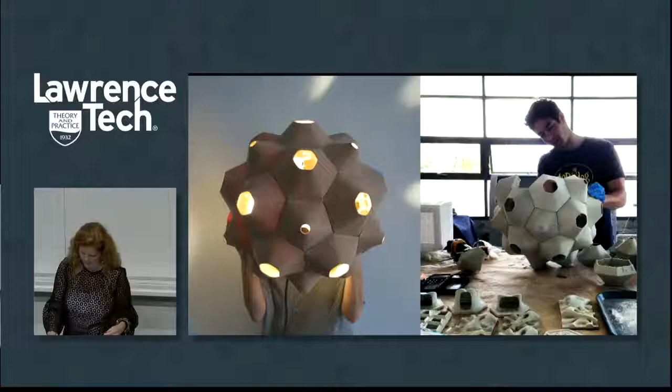not only can the digital file be sent across the world, and each of these parts can be printed somewhere else, they're small. They're the size of your hand. So someone can very easily assemble these small parts. And this same light fixture can be 3D printed out of different materials. So here on the left, you see copper infused filament, and on the right, white bioplastic, which is made out of corn.

Another advantage of 3D printing is that it allows for mass customization. You can design for specificity. So here in the design of this curtain, you can see, if you look at the drawings on the left, every one of these elliptical forms is a different profile and a different depth.

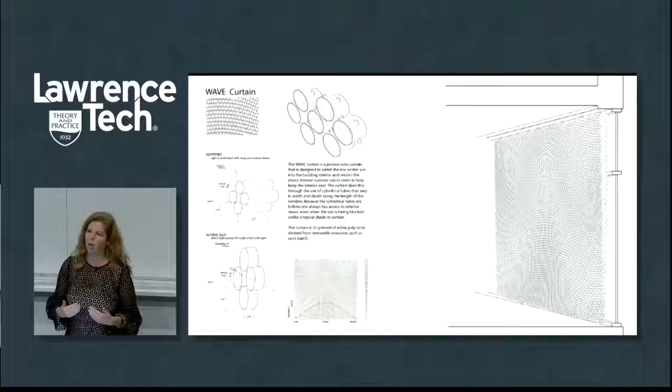And the narrower, deeper tubes are located at the top of the window, and that masks the summer sun from coming into the interior. And the larger, shorter tubes are at the bottom of the window, and that allows the winter sun, the low winter sun, to come in. So because every one of these tubes is unique, I have a customized surface that responds to the solar orientation and the geography of the building.

But it still allows me to have views out into the landscape beyond. So unlike a traditional curtain or screen that's veiling the interior, I can see downtown Oakland.

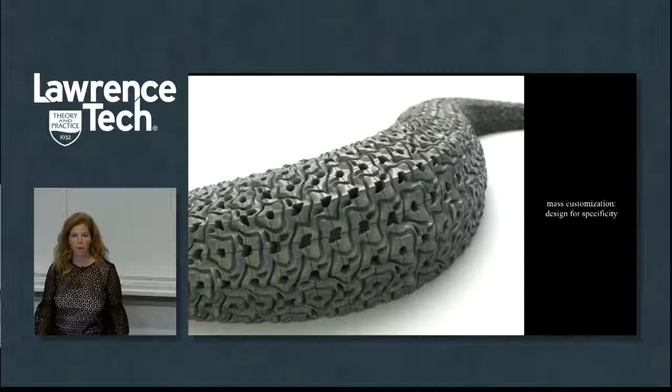Again, designing for mass customization with specificity. Unique, one-of-a-kind building components can be generated quickly and economically from advanced three-dimensional modeling software. This bench, for example, is composed of 300 unique 3D printed parts. It's inspired by the sea slug, a biomorphic interpretation of a bench.

The form comes from Flabellina goddardi, the newest species of sea slug discovered off the coast of California, and by the infinite tessellations of Japanese karakusa patterns. So those patterns are repeated across the doubly curved surface of the bench, and you can see here the 3D printed parts that come out of the printer in their green state, and you see that every one of them is unique.

All of these parts are finished and have a glossy coating on them so that they reflect the sunlight. This bench was intended to be outside. And they're assembled here together, again, as bricks or blocks or tiles that fit into your hand to make this 11-foot long 3D printed bench where every tile is unique.

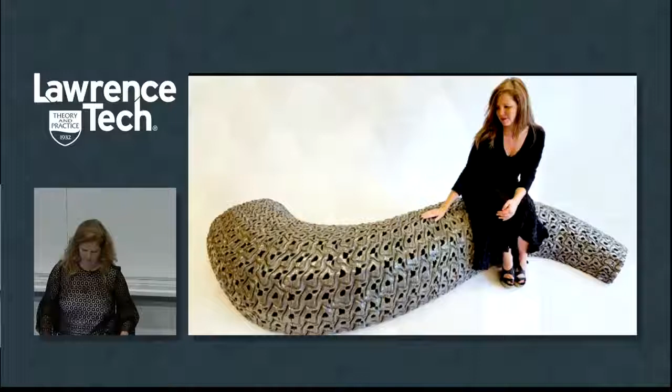So the Sea Slug demonstrates the potential for mass customizing. Because 3D printers don't care. They don't care if they're printing 1,000 of the same parts or 1,000 unique parts. The cost of the material is the same, and the labor needed to make each part is the same. Custom parts can be manufactured without additional costs. Now we can design for specificity, but we can also customize for variation.

In addition to powder-based printing, which you saw earlier, we're exploring paste extrusion 3D printing, and it's allowed us to explore radical 3D printing techniques, resulting in the development of a series of objects called G-code clay. Typically, extrusion-based 3D printed ceramic objects are defined by the layers of clay, whose striations are present on the surface of the 3D printed object.

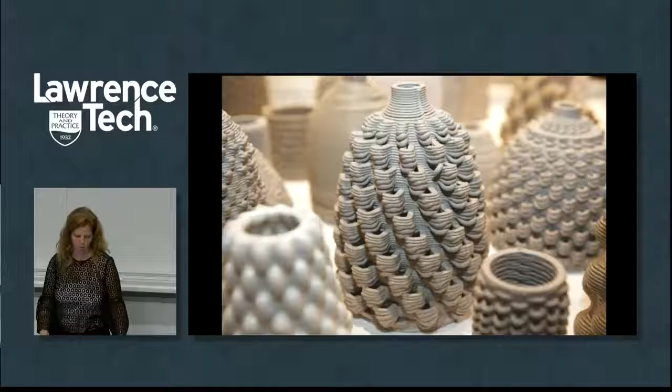But as demonstrated here, the surface quality takes on the appearance of a knitted textile. The clay is looped, purled, and knotted as it droops away from the surface. And occasionally, there's a dropped stitch, which causes a loop to pull away and make every single print unique.

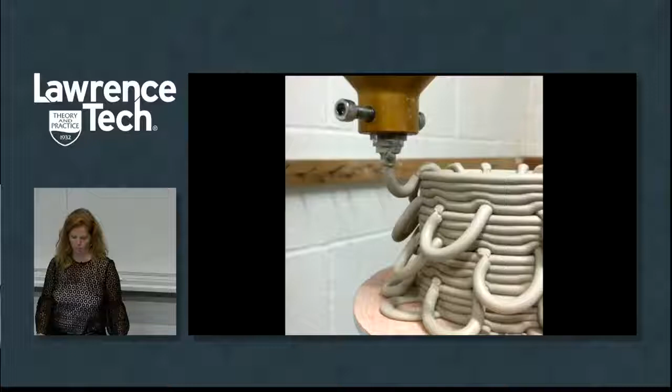The objects that are fabricated use various clay bodies. Sometimes we use recycled clay from the ceramics department at Berkeley. We use B-mix with grog. We use paper clay. We've used porcelain and other local clays that we've actually dug up in front of the architecture school.

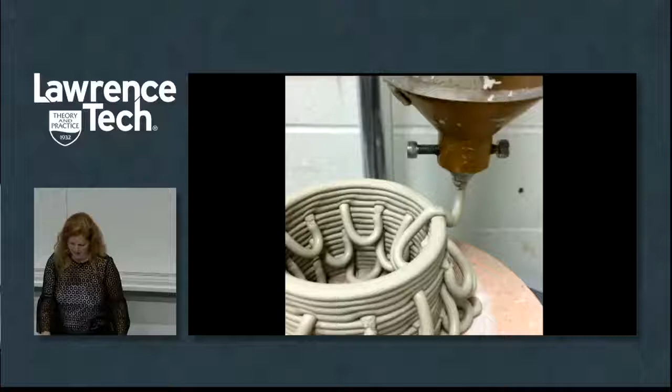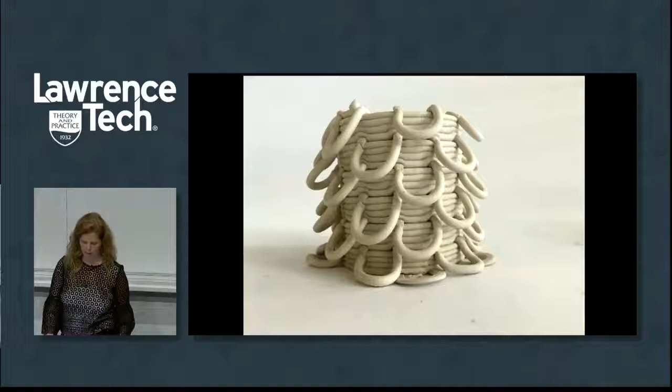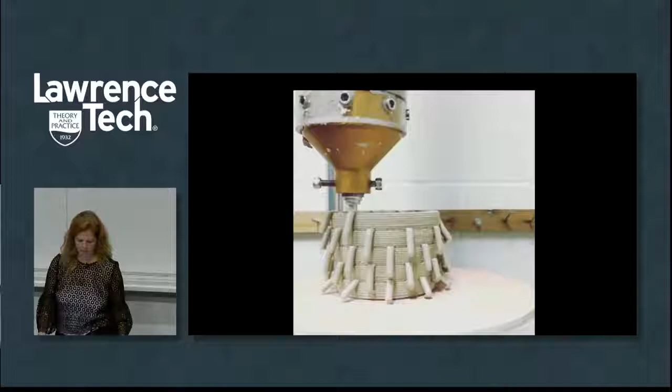This exploration doesn't concern itself so much with the shape or the profile of the object, but rather the path that defines the movement of the 3D printer. And through this exploration, the printer is pushed outside the boundaries of what would typically define the printed object. And we've created a series of controlled errors that create new expressions in clay defined by the plasticity of the material, gravity, and machine behavior.

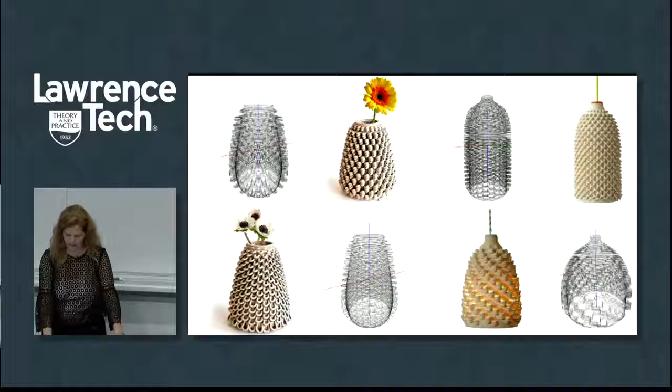The objects formed through this process have the potential to serve as enclosures for light and for life, such as plants and water. But we're working towards the creation of building-size enclosures that have distinct qualities of earthiness and furriness or softness. Enclosures that have textures that can enhance functions. For example, the texture on this mud dwelling in Africa serves as steps and speaks to the frequency with which the surface needs to be replastered.

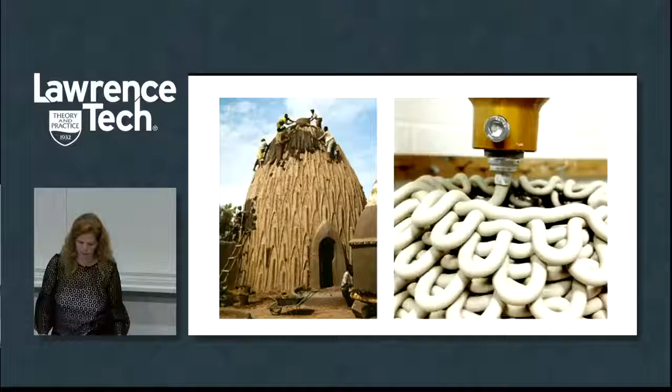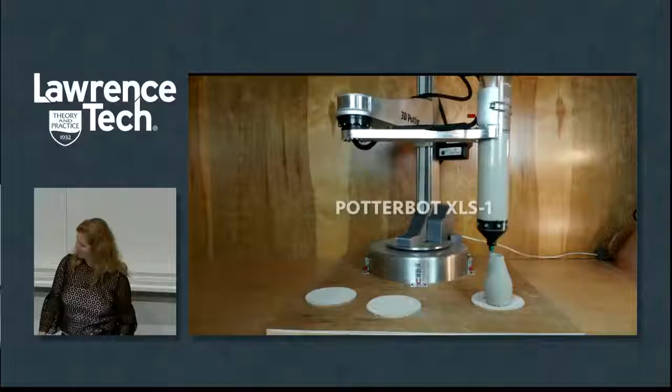And so we're working with an engineer to develop a high-speed, large-scale 3D printer, specifically for 3D printing clay and earth to make room-sized structures.

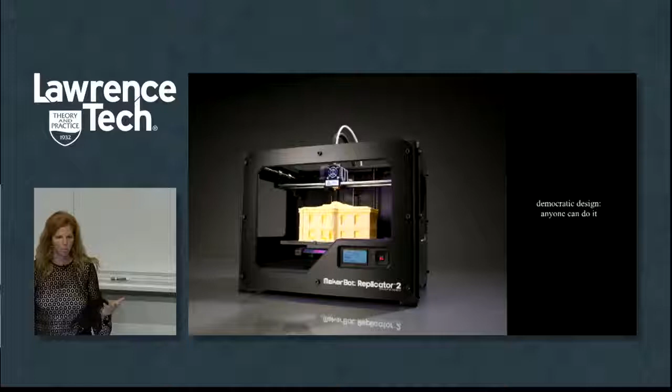Democratic design. Anyone can do it. You can do this too. You don't need a special, expensive 3D printer. Desktop printers sell for as little as $130 now, and you can buy one and have it on your desk in studio. You can use inexpensive ecological materials such as PLA or polylactic acid or bioplastic, which is made out of corn. And you can 3D print your own building components.

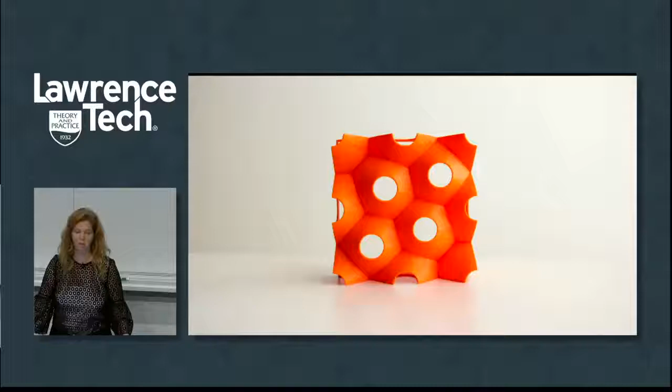This is a block we call the Picoroco block. It's a modular 3D printed object for wall fabrication, and it's shown here printed in translucent orange bioplastic. The wall behind the model here is composed of blocks with a dimension of 5.75 inches by 5.75 inches by 2 inches, so that it fits on the build bed of a small desktop printer.

3 different blocks are used in the construction of the wall, a 2, 3, and 4-hole block. And each block can be randomly rotated to create the variable pattern found in the surface of the wall.

The blocks are held in place with 3D printed orange clips that have 4 prongs that connect the blocks at the corners. The wall takes advantage of the translucency of the bioplastic, giving it a softly scalloped, diaphanous quality when used as an enclosure in front of a window or a light.

And one of the nicest aspects of this process is that it doesn't require skilled labor for assembly. Anyone can assemble their own objects and make customized enclosures. So these desktop printers have addressed the contemporary concerns around accessibility and custom manufacturing. 3D printing a custom enclosure is not a future proposition, it's a current reality.

So building on the knowledge that we gained making the Picoroco wall, Emerging Objects fabricated one of the largest PLA or bioplastic-based 3D printed structures built to date. It's called the Star Lounge. It's a unique form, and it's different from many of the other 3D printed structures that you've seen around the world because it demonstrates the architectural potential of using a farm of small, inexpensive desktop printers in order to 3D print a building. The freestanding dome is 8.5 feet tall with a footprint that measures approximately 11 by 11 feet.

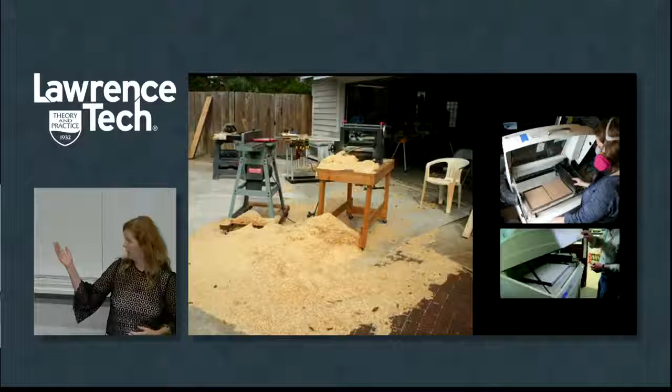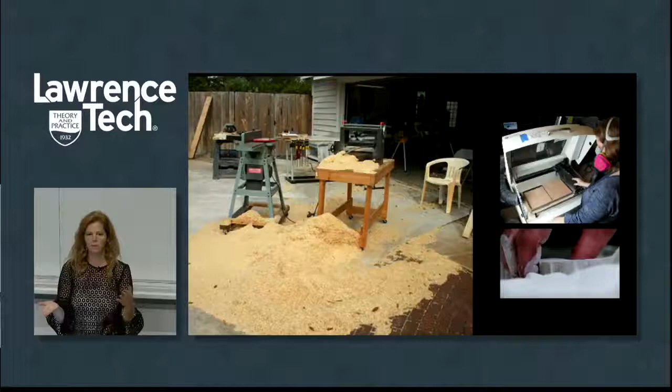And that supply bed is filled with the material, in this case, a plaster-based material, that raises up and spreads a thin layer across the build bed. And then an HP inkjet head sprays a binder onto a very thin cross-section of the digital model. That build bed drops down, the supply bed comes up and spreads another thin layer. And that happens hundreds or thousands of times until a three-dimensional object is made. It's then excavated from the loose powder, much like an archaeological dig.

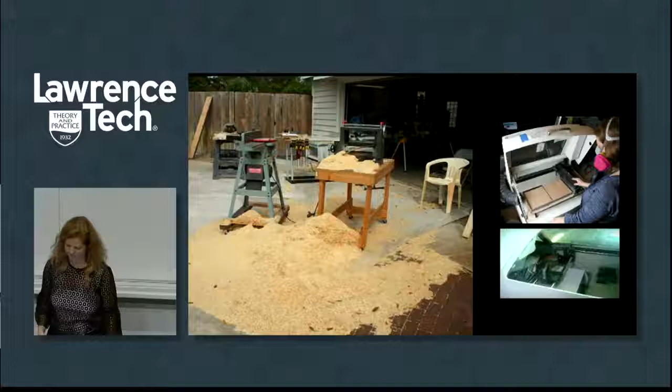So sawdust. 7.1 million tons of wood waste are generated in the United States every year. And of this, 89%, or 6.3 million tons, is potentially recoverable. And so we wanted to discover if we could recover this waste material to create a 3D printable wood material. And we did. So we've developed a formula for 3D printing with wood waste.

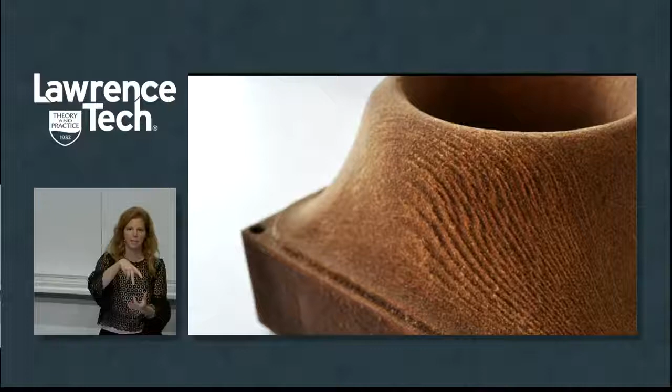It's sawdust that is then pulverized into a flour. And one of the beautiful things that emerged through this research is that there's a new kind of wood grain emerging here that's based on the orientation of the object in the 3D printer. So we can control that wood grain based on how we position the digital model in the printer. It's translucent when you print it thinly enough.

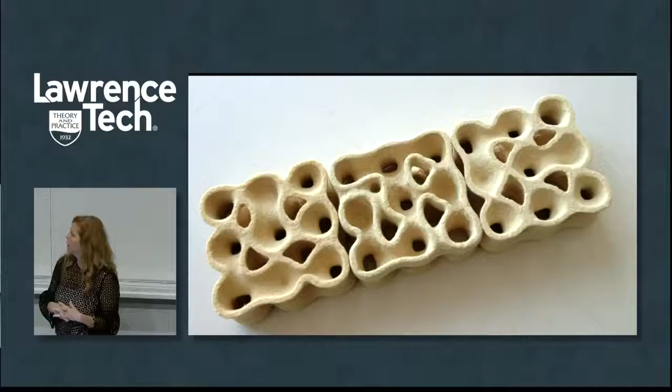And we've experimented with different types of wood. So this is a softwood, it's pine. This is maple. And this tile is made out of walnut shells. And that tile is designed again using the Karakusa pattern to repeat across a surface continually and be rotated to hide the seams to make a much larger pattern, one that has pores in it that allows for the passage of light and views and air.

So no waste, and we've touched on material innovation. There's more, okay? So through material innovation at Emerging Objects, we're able to address one of the world's most pressing issues today, the impact of production, consumption, and the disposal of goods upon the Earth's resources. We want to invent materials that are sustainable, durable, and affordable, that can be used to craft and construct new objects for the built environment.

So to emphasize this point, I just want to tell you a little short story. This is a very simple object. This is a very humble teapot that was manufactured by Friesland Porcelain and sold by the Melitta Group in Germany in the 1970s. The teapot was purchased in Salt Lake City at the Zion's Cooperative Mercantile Institution. This was the first department store in the United States, by a woman named Sandra Newell.

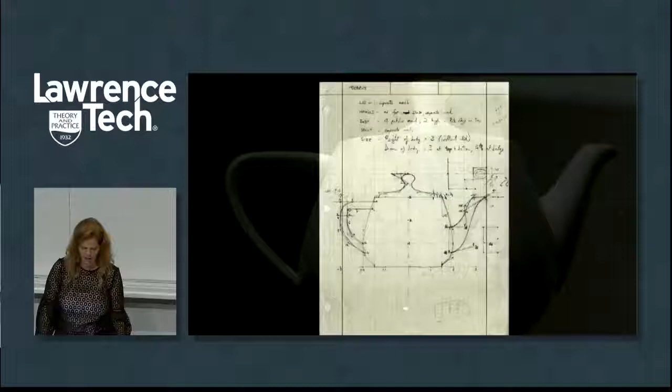For his work, her husband, Martin Newell, needed a simple mathematical model of a familiar object. So Sandra suggested modeling their tea service since they were sitting down for tea at the time. So Martin sketched the teapot freehand using graph paper and a pencil. And following that, he went back to the computer laboratory and edited the Bezier control points on a Tektronix storage tube, which I don't even know what that is. This is like so long ago. Again, he did this by hand.

So starting from these and with some algorithms, he created a mathematical model for the teapot. It turned out that the teapot was the ideal object for the graphics experiment of the time. It was round, it contained saddle points, it could project a shadow on itself, and could be displayed accurately without a surface texture. So Newell made the mathematical data that described the teapot's geometry publicly available. And soon after, other researchers began to use the same data for their computer graphics experiments.

And the teapot quickly became a beloved staple of the graphics and computer community. Teapot after teapot graced the pages and covers of computer graphic journals. Anyone with a new idea about rendering and lighting would announce it first by trying it out on the teapot. It's been rendered as if made of alabaster, red brick, leopard skin, and animal fur. And most famously, in 1987, a paper introduced the image, casually describing it as one of the 5 Platonic solids, plus the newly discovered teapotahedron.

Another material we've been experimenting with: Chardonnay pomace. Pomace is the solid remains of grapes after pressing the fruit to make wine. It contains the skins, pulp, seeds, and stems of the fruit. Grape pomace has traditionally been used to produce brandies such as grappa, which the Italians have done for thousands of years. But today in the United States, pomace is mostly used as fodder and fertilizer. But much like the coffee cherry, grape skins and seeds also have the potential to be dried and ground into fine powders for 3D printing. So we've used Chardonnay pomace to make wine goblets and Chardonnay building blocks, which we radial arrayed to make an ice bucket for Perrier-Jouët.

But perhaps one of the most frequently used materials in our studio is salt, because we are in the Bay Area, so it's a local material for us. It's been industrially harvested from the Bay for over 150 years. At its peak, the Bay had 40,000 acres of land dedicated to salt production and produced over 1.3 million tons of salt annually. It's a renewable resource, it's incredibly inexpensive, and it's made simply through evaporation. The Solar Salt Works in the San Francisco Bay uses only natural power from the sun and the wind to make this material. It can be printed and formed into objects that we're familiar with, such as functional salt shakers.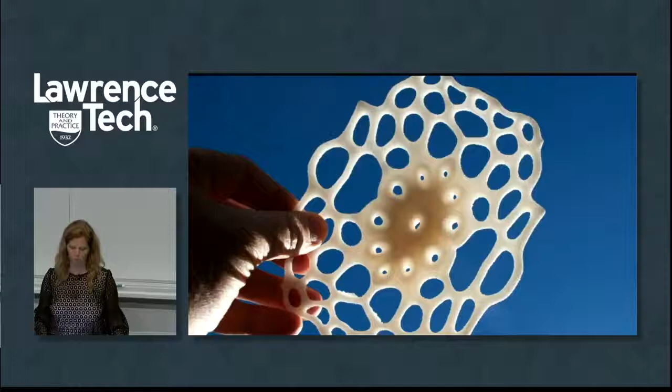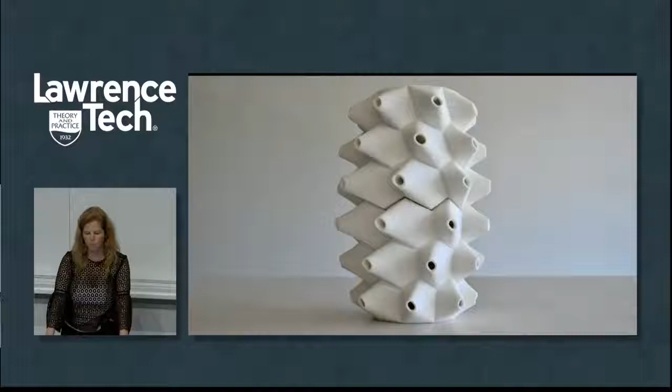Salt always has incredibly beautiful optical properties of translucency, no matter how thick or thin it's printed. We've experimented with shaping the salt blocks into forms that would otherwise be impossible to make with molds. And we've experimented with techniques for interlocking, stacking these 3D printed salt blocks, and have explored the structural properties of the material as well. The micronized salts we print with have an ultra-fine resolution and can be printed very thinly with very, very fine details.

Each fall in the Bay Area, 150,000 tons of salt is harvested. So this is last year's harvest at the beginning of the harvest. So it's a pretty amazing sight to see.

The company that owns the crystallizers in the Bay has given or sold 16,500 acres of land to the government for wildlife redevelopment, and an additional 1,400 acres has been set aside for a residential development of 12,000 homes for 30,000 people, which raises the question, does salt have the potential to be an integral material resource for this housing development should it happen? So we decided to create a Saltygloo, kind of igloo, made out of salt and glue, to see if we could harvest this material from the ground beneath our feet.

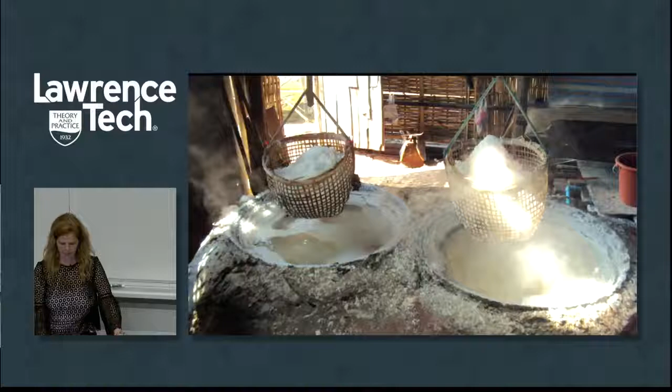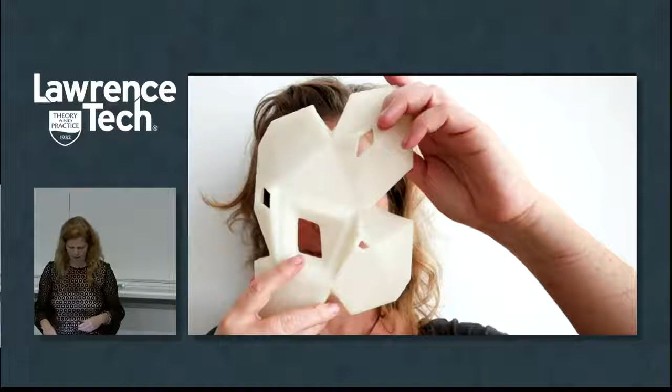And we were inspired by the forms we found in traditional salt extraction processes and designed an igloo that could be 3D printed with the salt from the San Francisco Bay. We designed and printed individual tiles that had crystalline forms inspired by the microscopic forms that you find inherently in salt crystals. And we created an enclosure made out of salt. The salt is intended to preserve and enhance the role of the interior environment. It allows diffuse light to enter into the interior. And from the exterior, one can see glimpses of the interior.

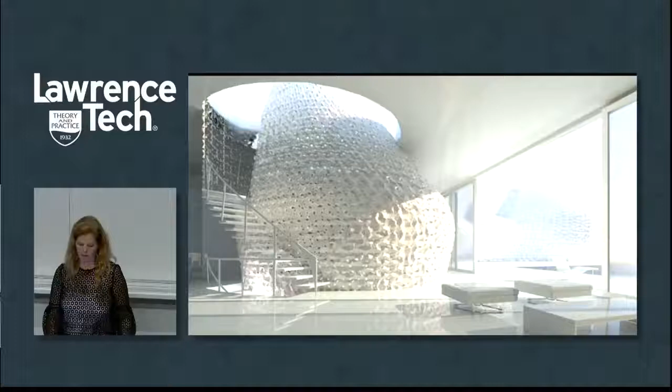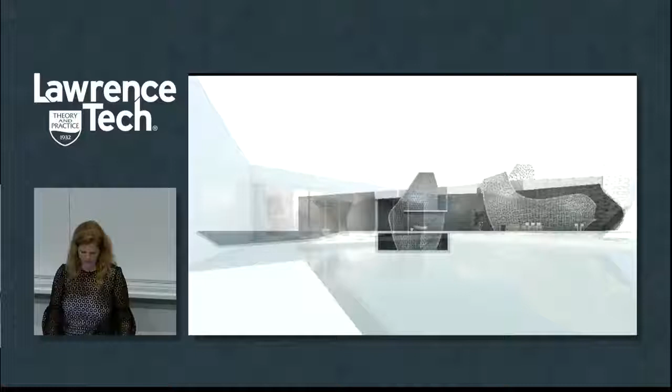We always imagined the Saltygloo would be used in the interior to create semi-private enclosures, to envelop spaces such as dining rooms where this material connection seemed logical and meaningful, or maybe a bedroom that could be enhanced by the softening of light. The Saltygloos are objects in the interior. They serve as vessels for human activity.

Rubber. This is another material that we've experimented with. Automobile tires are one of the planet's biggest waste problems. In the United States alone, 290 million scrap tires are disposed of every year. Around 80% of those tires are recycled, but we'd like to find a new application for the rest, which is 60 million tires still. In fact, the world's largest tire graveyard in Kuwait is so vast that it contains over 7 million tires and is visible from outer space. Worldwide, there are almost 1 billion tires discarded annually.

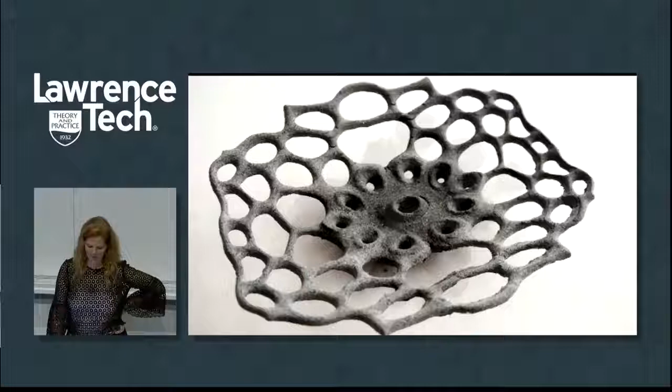Discarded tires are so problematic because of the large amount of tires produced each year, their inability to degrade, and the fact that they contain a number of components that are environmentally damaging, such as carbon black. So we've been working with a company that's developed a material called MRP, Micronized Rubber Powder, and it's generated through a cryogenic manufacturing process. The tires are frozen, reduced to a rubber crumb, and then ground into a really fine mesh that might typically be used in roofing or in asphalt pavement. The rubber powder is incredibly inert, and therefore it's mixed with other additives to make it printable. And the mixture is adhered together with an organic binder.

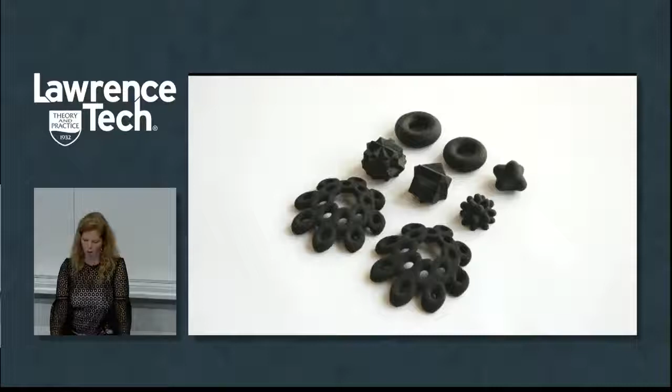Recycled rubber tires are often used to make very refined building products such as floor tiles, carpet padding, roofing tiles, and waterproof membranes. But using MRP, we're able to turn this waste material into new objects. And we imagine new products emerging as well, such as furniture for the interior or possibly for playgrounds in the landscape.

Cement. Cement is the most ubiquitous building material in the world, and it needs to be transformed for 3D printing. According to the United Nations Environment Program, in 2012 alone, the world used enough concrete to build a wall 89 feet high and 89 feet wide around the equator. From 2011 to 2013, China used more cement than the United States used in the entire 20th century. It's estimated that 10 billion tons of concrete are produced worldwide each year, which translates to 2 tons of concrete per person in the United States. So this means unrivaled amounts of natural resources are being depleted annually just to produce concrete.

Of equal concern is the issue that the production of Portland cement releases enormous quantities of carbon dioxide into the atmosphere. And 1 billion cubic meters of water are used each year in the production of concrete as well, demanding an urgent call for concrete design and production to become more ecologically responsive in the 21st century, as the planet cannot continue to consume concrete at our current rate.

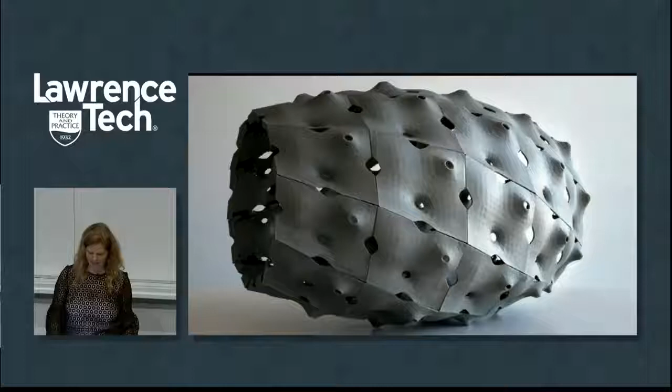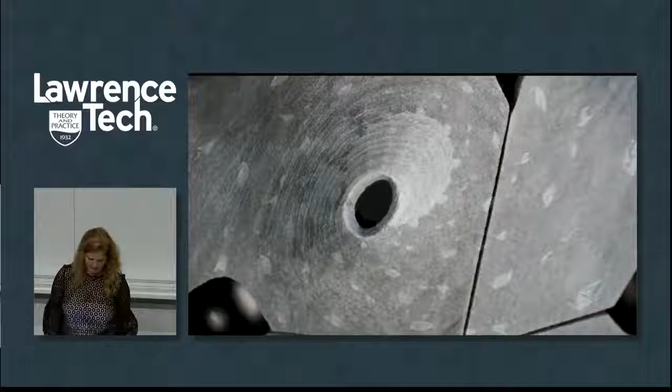So we've experimented with aggregating these 3D printed concrete tiles to create larger objects. We've experimented with different methods of attachment. This slide shows an early method of fastening using binder clips. We've experimented with different finishes, so glossy, which you saw in the seat slug at the beginning of the lecture, matte here, which has been sandblasted to bring out the grain of the 3D printed cement.

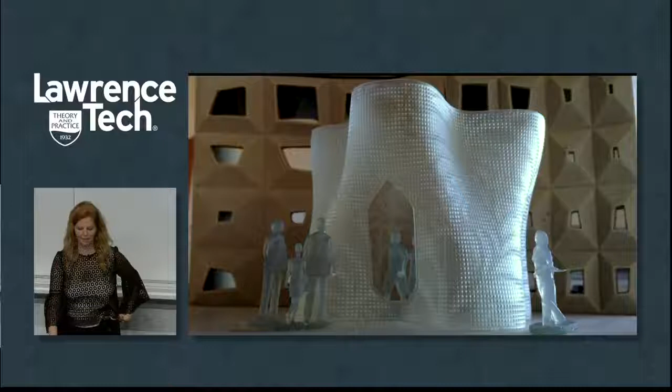These tiles, 20 hexagons and 12 pentagons, are assembled together to make the P-ball, a puffy spheroid or a buckyball, in which each tile is unique and has a specific geometry that allows the parts to come together to make a more complex whole. And one of the most rewarding aspects of 3D printing for me is that the digital model used to make a scale study model is the same digital model that can be used to print something at full scale.

So Bloom is an experimental pavilion that explores 3D printed Portland cement at an architectural scale. It's 9 feet tall with a footprint that measures 12 feet by 12 feet, and it's composed of 840 customized 3D printed cement blocks. The floral motif embedded in the surface of Bloom is derived from traditional Thai flower patterns, and it's mapped cylindrically onto the surface of the structure.

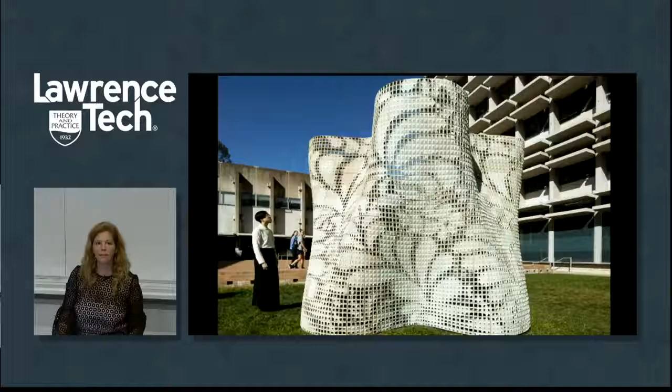This creates a figural pattern comprised of openings in the surface that produce stunning visual effects of light, shade, and shadow on the exterior and the interior. On the interior, one can find an internal structural grid that carries the forces of the weight of the cement block down to the ground.

The individual blocks were printed on a print farm of 11 powder printers with a special cement composite formulation comprised of iron oxide-free Portland cement. Iron oxide imparts a gray color to cement, and its removal makes these blocks much, much lighter in color. And if you look closely, you can see the holes that are printed into the sides of the blocks, and that's how the blocks are fastened together.

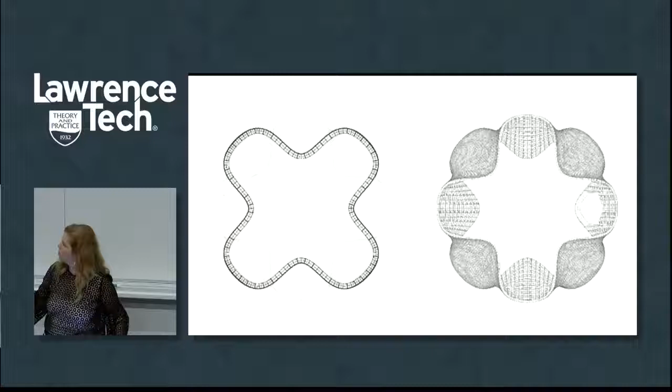The blocks at the bottom of the wall are about 5 inches deep, as you can see in the drawing here on the left in the floor plan, and the blocks at the top of the wall are about 1 inch deep to reduce the weight of the blocks as the load is transferred down. The curvilinear form of the overall structure adds stiffness to the thin, lightweight shell.

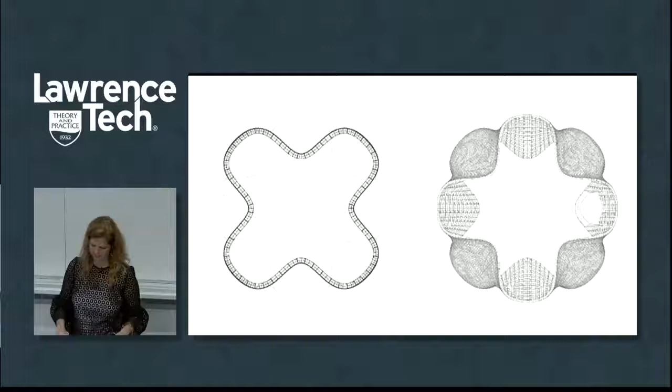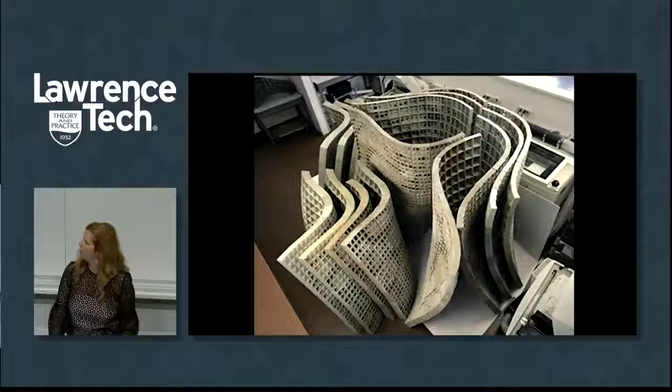In plan, Bloom is a curved cruciform that rises 9 feet to meet the same shape that's rotated 45 degrees, creating a torqued X, with an entrance 45 degrees off its primary axis. All of the blocks are enumerated to designate their position in the overall structure. And they've been assembled into 16 large, lightweight, prefabricated panels, which can be put together in just a few hours to create an enclosure.

So this quick video just shows how quickly the pieces come together and how it can be set up and dismantled. It's been shipped around the world in these large pieces, and they're also very lightweight. So there's a lot of air and porosity in these 3D prints, which reduces the mass.

Okay, so now it's time to wake up a little. Okay, so we're going to talk about bad ombres and switch gears. So ombres that are simply bad are because they don't transition from light to dark or from one material to another seamlessly, because they're abrupt, they're harsh, they're unnatural, they're out of place, they're artificial affronts.

So when Donald Trump said he wanted to build a wall to keep out the bad hombres, he was referring to bad men. But what he said was bad hombres, which is something entirely different and something that a wall, a distinct line, or a boundary creates. An ombre allows for unbroken transitions across borders and between landscapes. It crosses political boundaries fluidly and allows for continuous cultural connections to be made.

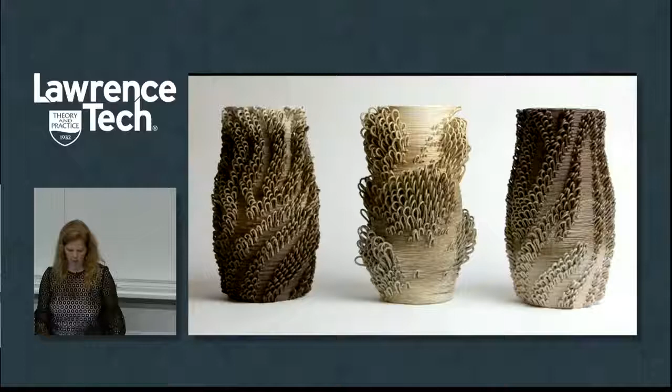So in response to Donald Trump's bad hombres statement, we've created a collection of 3D printed objects in clay. The objects smoothly transition from one material to another seamlessly. And the clays come from all over the world to California, where they're combined in a single tube that extrudes clay continuously. Using G-code, the computer language that speaks to the printer, we take the clay on a walk along a path.

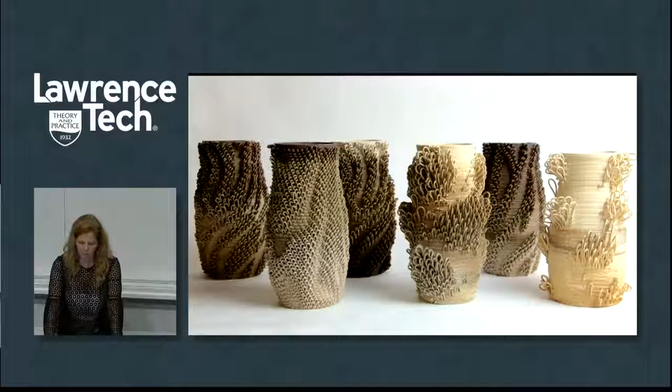The whitest clays are porcelain from the Matauri Bay in New Zealand, where the porcelain is translucent and resonant. The dark black mountain clays come from the pits of the South in the United States, and these clays are mixed in California to create a custom recipe that makes a new, stronger body. Through the use of varying clays, the bad hombres are intended to create new geographic and geologic landscapes. They're objects that transcend borders.

They're simultaneously rooted in the ground from which they emerge, yet they're global and elusive. No object in this collection will ever be recreated exactly the same way again. Failure, individuality, distinct character, unique markings are all what make these pieces special. Their differences make them one of a kind, but the ombre itself ties them together.

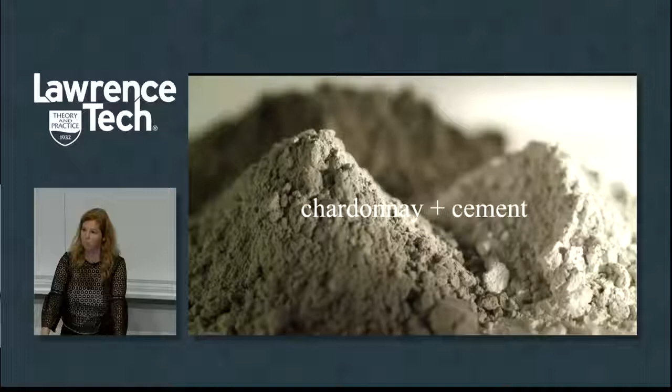So we've been pursuing continually this idea of ombre and decided to introduce it to the powder materials as well. And we wondered, would it be possible to move seamlessly from one material to another? And how does that enhance our understanding or perception of material, color, or culture in objects?

So to begin this research of creating material ombres using the powder-based 3D printing, we started with Chardonnay and cement. Cement, of course, being the most ubiquitous building material we could find, and the Chardonnay being an abundant local material for us in the Bay Area, as it comes from close by Sonoma.

So we printed tiles out of cement and Chardonnay, and we also mixed the cement and Chardonnay together. And this gave us a large surface, but there were still joints in the material, which pushed me to develop a formula for printing with Chardonnay and cement, one that would allow for the smooth transition from an architectural and agricultural material to a geological material without any joints, adhesives, or mechanical fasteners.

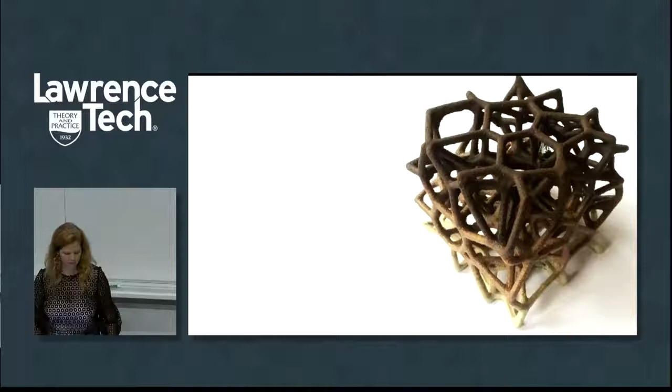So it's now possible in a formally complex 3D print to move seamlessly from a full-body Chardonnay to a more subtle tint finish with a pale, crisp cement. And I realized that depending on how the supply bed of the 3D printer is filled, one could control that material ombre. The ombre decanters shown here demonstrate a gradation from the Chardonnay to the cement.

The forms of these decanters are inspired by ancient ceramic wine carafes and amphora, and the surface textures are inspired by the diamond pressed texture frequently found in objects such as wine glasses and decanters.

An attempt to create a new color provoked me to test 3D printed curry with cement. So the object shown here is printed in a combination of curry and cement, both customized recipes using off-the-shelf materials that demonstrate the ease of creating evocative, multisensorial objects. The aroma of the curry as it's being printed is pervasive. It fills the room. This object is now 8 months old and it still is fragrant.

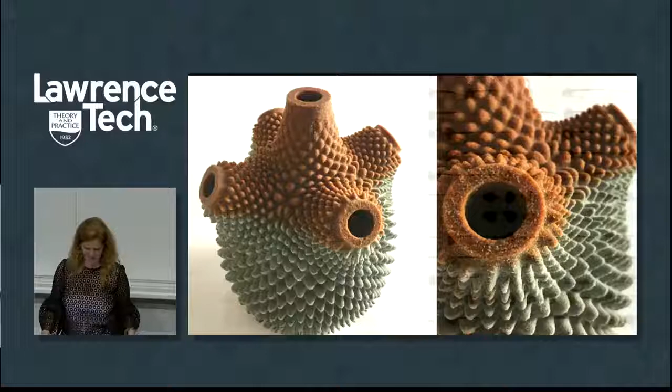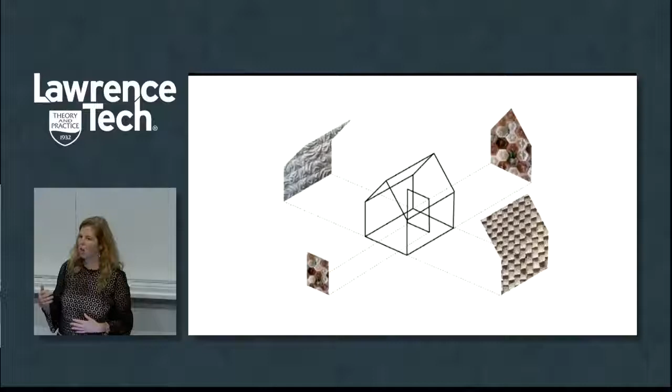And finally, what's next? A 3D printed cabin. So we're trying to bring all of these materials and technologies together to build a building made out of 3D printed components. This diagram just illustrates how we're bringing together 3D printed ceramic tiles on the exterior, 3D printed bioplastic tiles on the interior, Chardonnay and cement tiles on the front and back facade. And we're about 75% of the way finished.

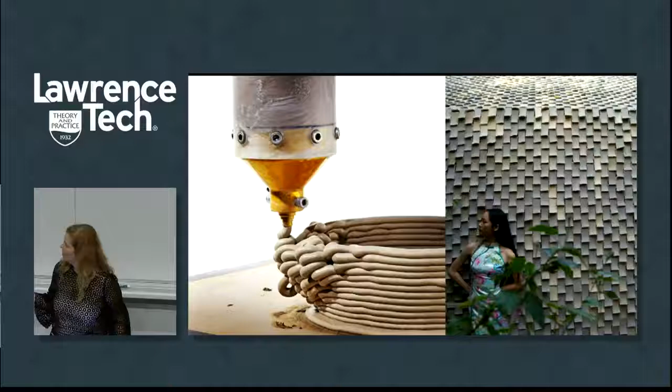So here you can see the 4,000 ceramic tiles that are cladding the roof and the exterior walls, the bioplastic panels that make up the interior. The panels are translucent. They have color-changing LED lights behind them, and they change color with the light as well. And here, of course, are the Chardonnay and cement planter tiles that will hold vegetation. The building is located in a garden.

And it's our goal to make everything using this technology and the materials that we've been experimenting with. So we're printing and designing our own furniture, such as chairs. We're designing the tables, the tabletop accessories, and even the hardware, with the intention of creating a total work of 3D printed architecture, interior, and art. One that uses innovative materials, has no waste, can be manufactured on demand, and printed by anyone, even you.